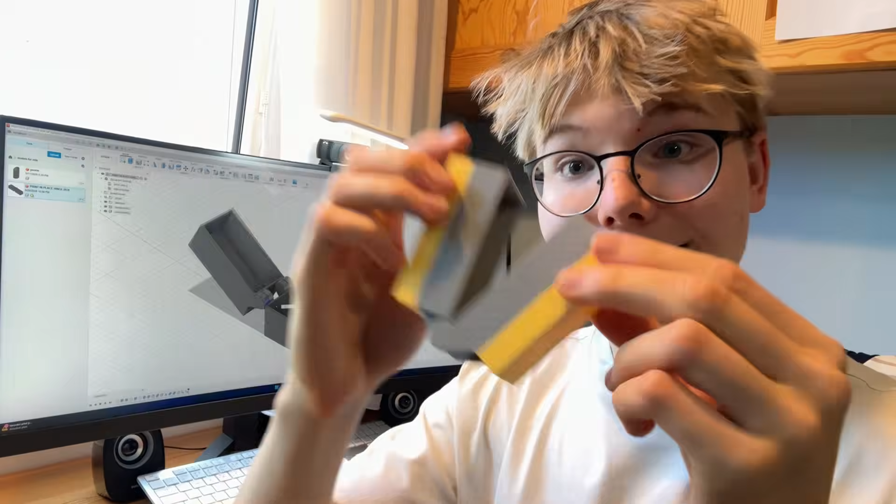This is a box of hinges and it was designed using Fusion 360. So let me show you how to do it to make it completely print in place. No extra talking, let's go.

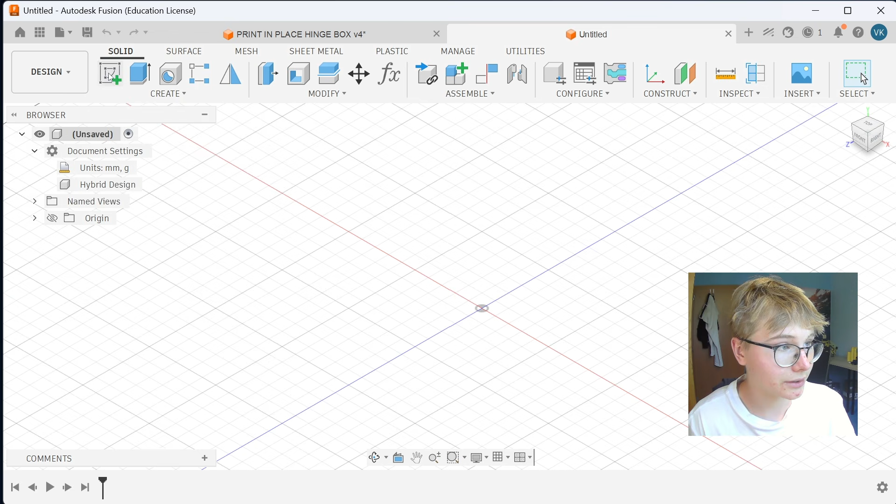Start a new Fusion project, and as always, save it somewhere so that you always know how to find it by going into File, Save, and then saving it somewhere on your computer where you know you will always find it. Now, when we start sketching, you will go to Create, Create Sketch, click on this bottom plane right over here, and now we will be making the boxes.

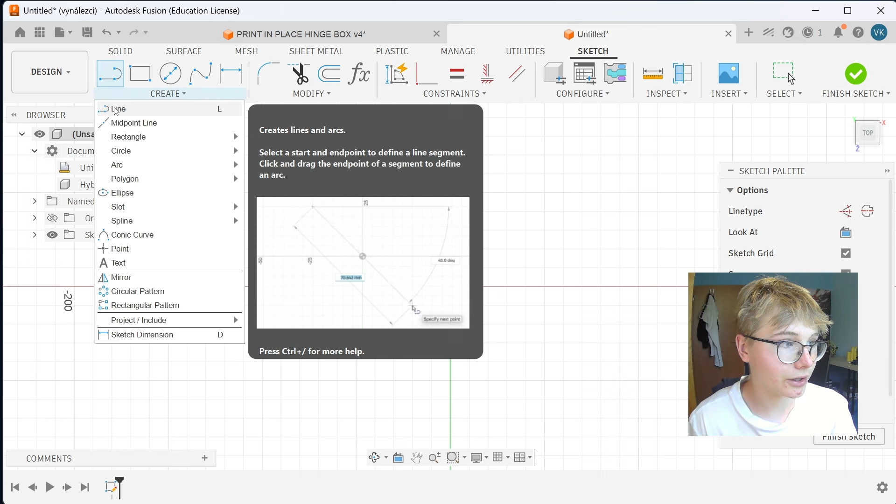So these sizes will really depend just on you, but I will make my own dimensions, and if you want, you can follow me. Now, go in the Create section. On the rectangle, we will be creating a 2-point rectangle. First of all, we will be creating it on the first side. Then we will click either L, or you can go in the Create and click on Line, because we will need to connect it with the center so that we can then space this line so that we know how far the boxes will be apart from each other.

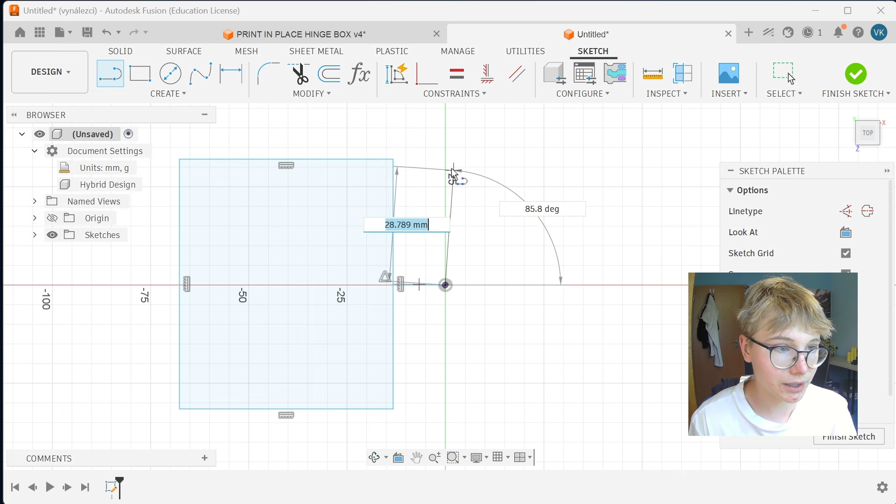And then we will need to create the mirror line, which we will use to mirror the box on the other side too, so that they are both the same size. So you will again select the line tool, start from the beginning, stretch it up. Once it's stretched up, as you can see, I don't have it constrained.

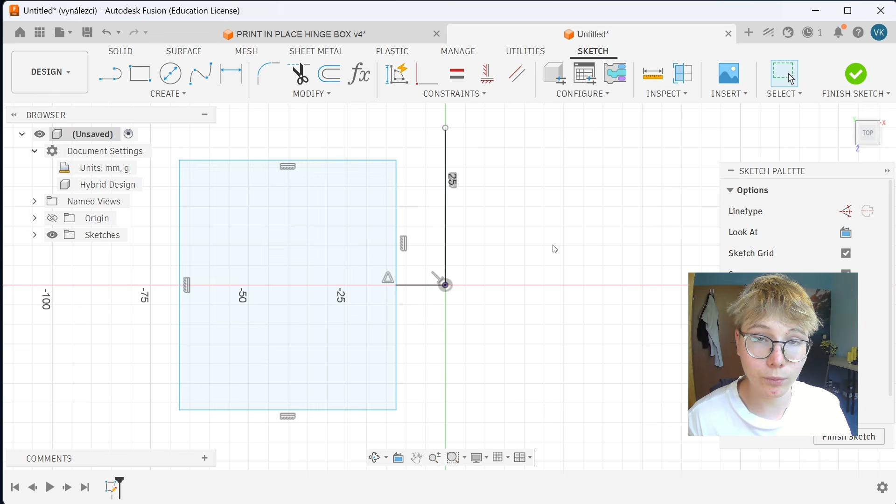So what I can do is go into constraints, then select horizontal or vertical, and as you can see, it automatically places the line so that now it's actually vertical, and it will stay that way, because if it wasn't vertical, it would mirror it somewhere completely else than I want it to be. Now, all we need to do is give dimensions to this box, which will be the outer wall of the box. Basically, this rectangle that is down there. The wall will then, of course, shrink it a bit.

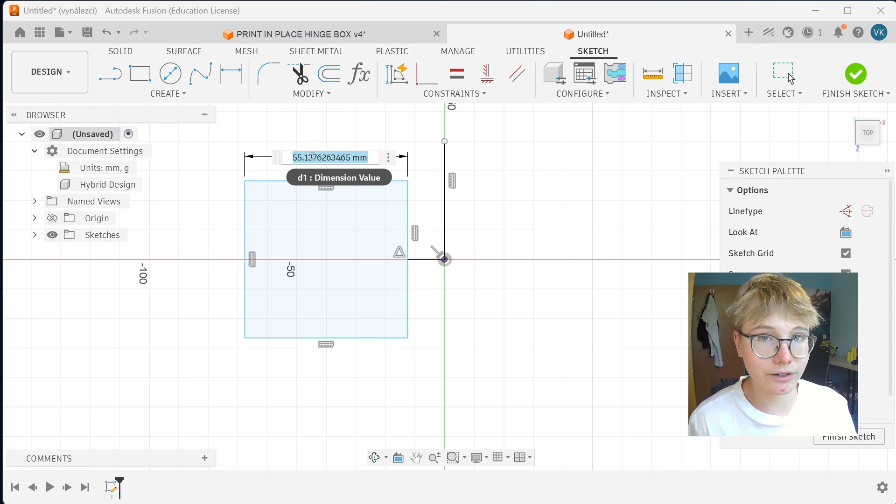To dimension it, you can go in the Create section, select sketch dimension, and then click on the box's sides and start dimensioning it. But as I always suggest, use the shortcuts. So instead of going in the Create section, you will just click on D. Once you click on D, you have the dimensioning tool in your mouse, and you can click the side that you want to dimension. Let's go, for example, for 80 millimeters.

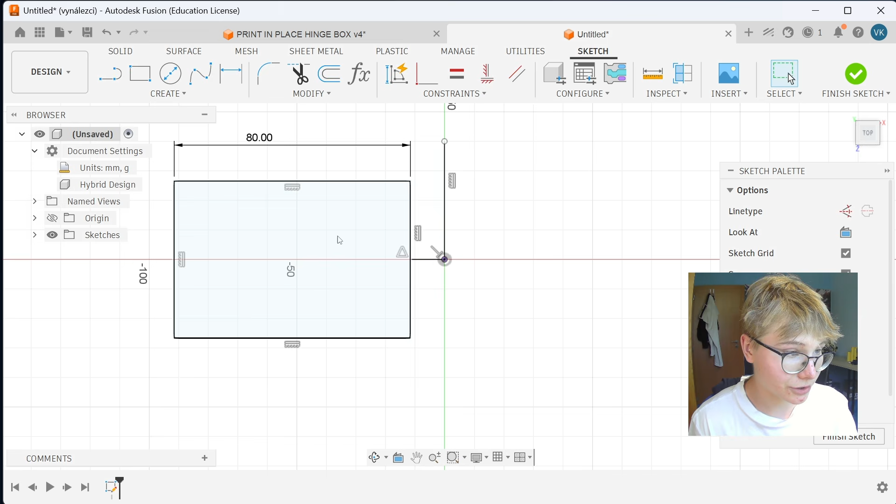And as you can see, the rectangle right now moved completely from the center. So we can just move it back because we don't want it to overlap to the other side. So once we have this dimension set, you can set the dimension for this side exactly the same way. That might be a bit small, so I will make it a bit bigger. If you want to edit the dimension, you just double click the number, and it allows you to enter a new number again, for example 35. As you can see, it edited it right away.

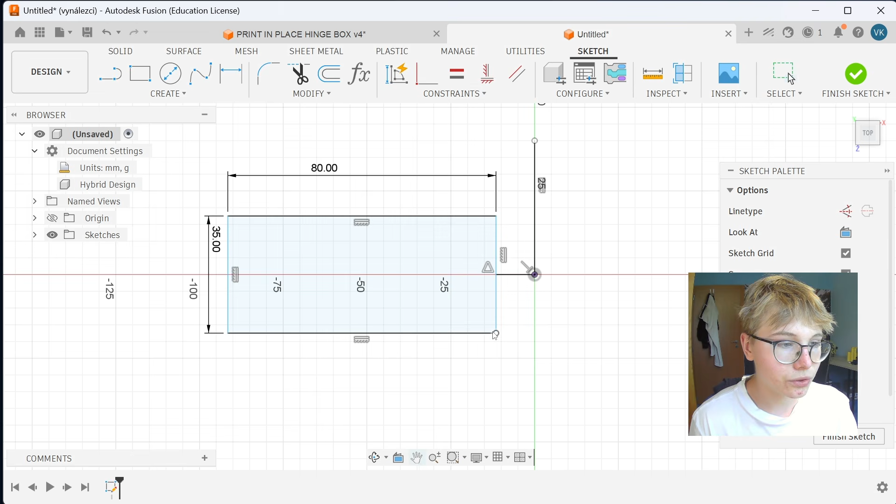The sketch isn't fully constrained. To know if it's not fully constrained, which means basically that Fusion doesn't know all of the information it needs about the sketch, you can just move the blue lines and it will show you exactly the dimension that we need to set, because you always want to end up with a fully constrained sketch.

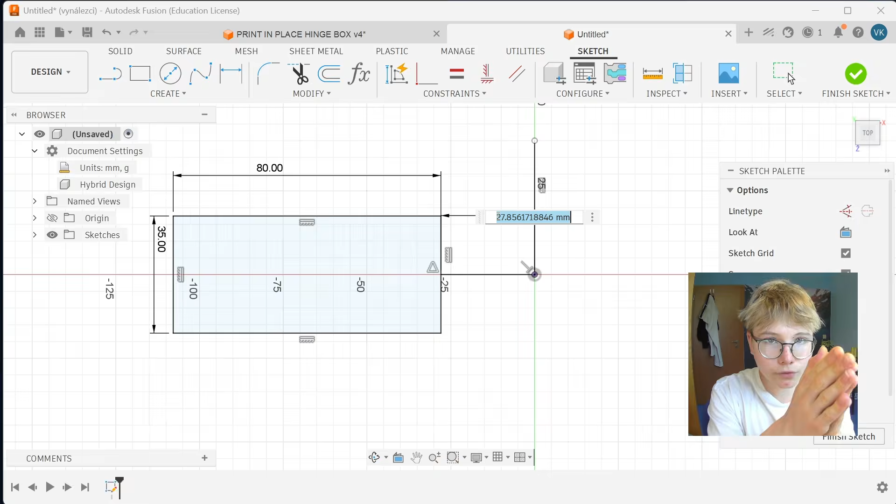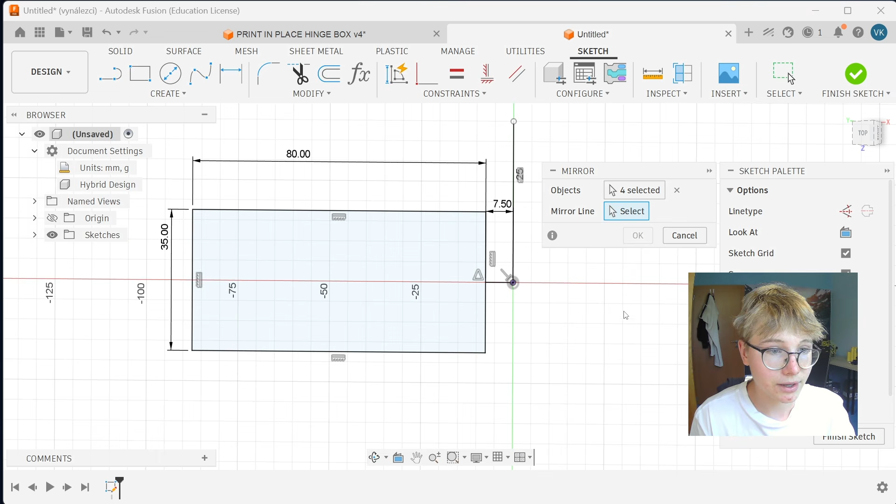So you can just again go to the dimensioning tool, select the line that you want to dimension, and because this is only half of the gap between the rectangles, you can set it to half of the gap that you want to have. So for example, if I want a 15 millimeter gap, I will just go for half of that, which is 7.5 millimeters. Once I put it in there, we can mirror this to the other side. To do it, you will go into the Create section, select Mirror, select all of the rectangle sides, and now select the mirror line that we created, and as you can see, it will pop it right to the other side.

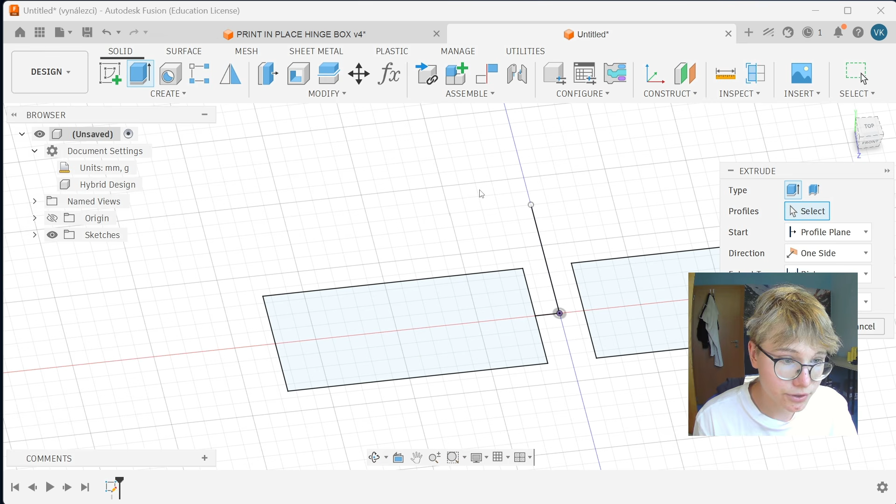Once you have that, you can click Finish Sketch to make the bottom of the whole box, which the walls will then be sitting on. You will just go to the Create section and start extruding, but as I suggest, always use the shortcuts. Extrude is E, so click on E. As you can see, the extrude menu pops up, and now you can start extruding.

So select both of the profiles, and we will be creating the base they will be sitting on. And since we are going down with the extrude, you can just put it in a minus size, because it will be going down, and because I want only 2 millimeters on the bottom, I will be extruding it minus 2 millimeters down.

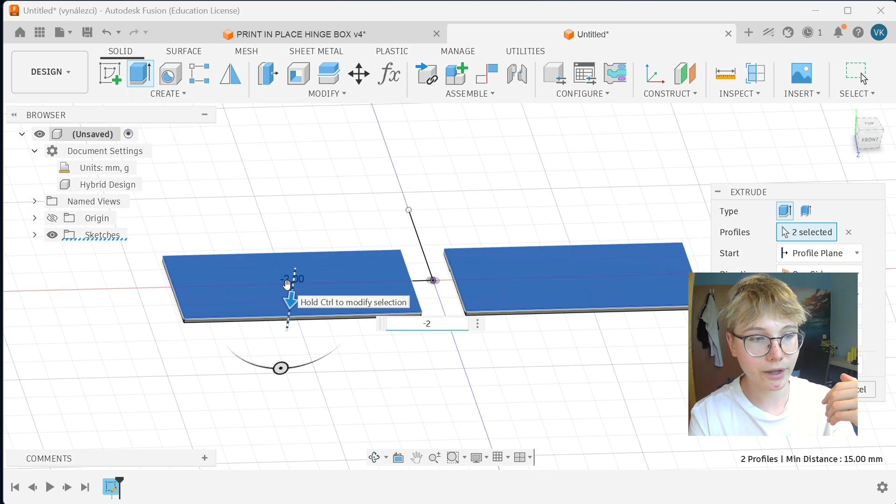Once I hit enter, we have these new two base plates for our boxes created. Then we will extrude again the exact same profiles, but now using something called thin extrude, which only extrudes the complete outline of what you are extruding. So that will create the walls for the boxes.

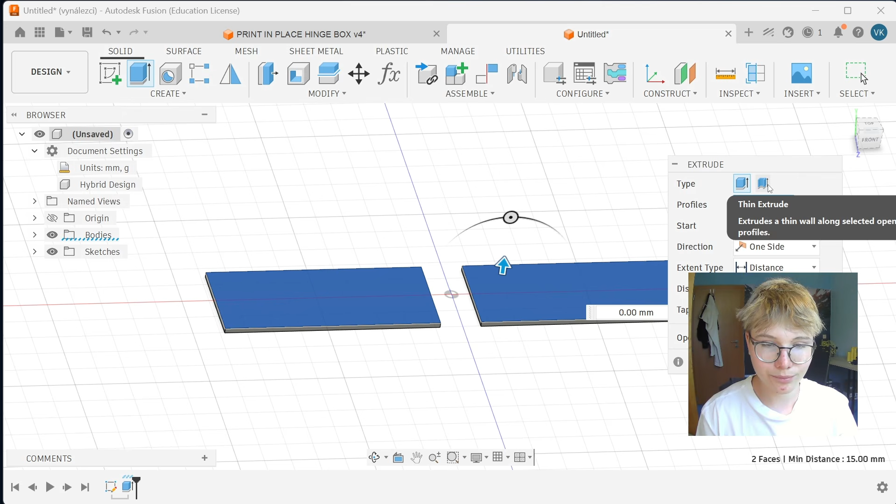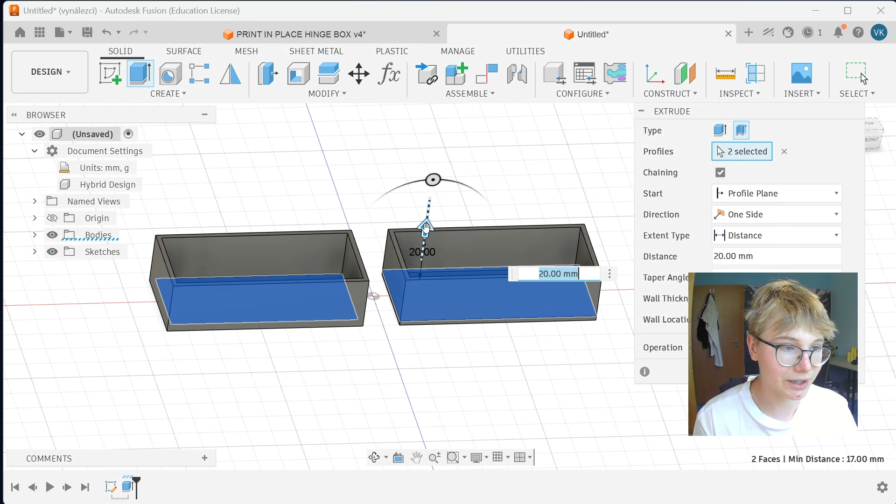As you can see, you can even select the wall thickness. Because 1 millimeter is pretty thin and the 3D printer would have problems printing it, I will set it to 2 millimeters so it has some rigidity and doesn't break when I print it. Once you have that, you can start extruding it up. Let's say 20 millimeters right now for the extrude.

We will be sketching one of the sides of the boxes. So create sketch, click one of the sides of the boxes, and now you need to project the boxes. Go into the create section and click project. There's a shortcut for it, which is P, and you'll be using project quite a lot, so I definitely suggest learning the shortcut. Click P and just click both of the objects. As you can see, when I hit OK, it puts the sketch of the things I had already created.

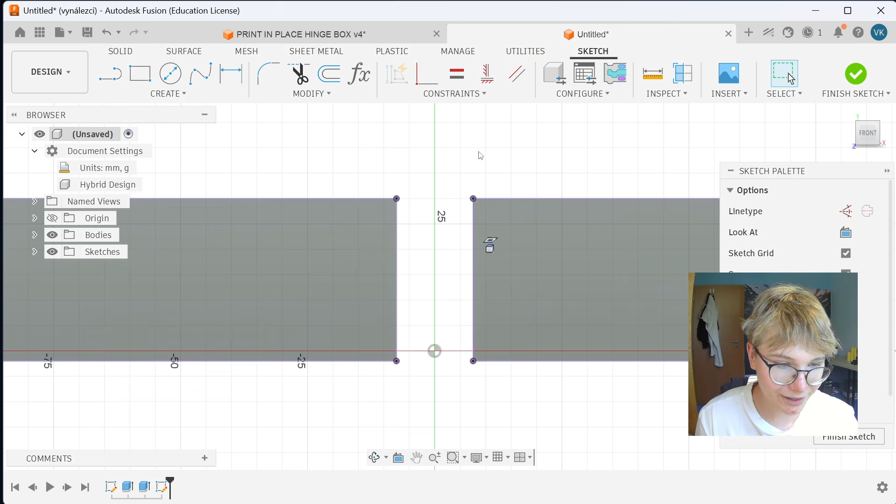Now we will be making the hinge. It will use the line tool, so click L or go into the create section, and connect these two lines on the top. Now to create the main body of the hinge, you can click C for circle, or choose it in the create section, start from the center of this line and stretch it out.

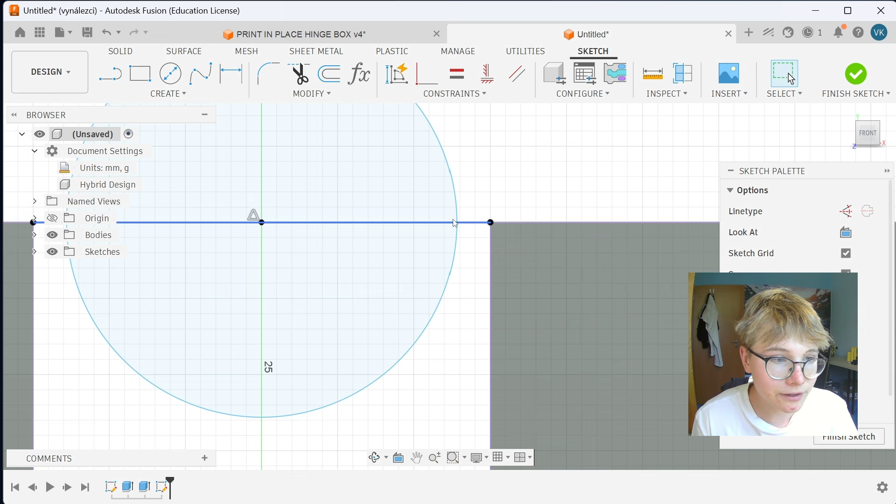I always recommend leaving a bit of gap so it doesn't interfere with the boxes. Click the dimensioning tool, then right click the circle, and instead of picking circle arc center, pick circle arc tangent, so you can input, let's say 0.5 millimeters, because now there's 1 millimeter of space between the hinge and the boxes.

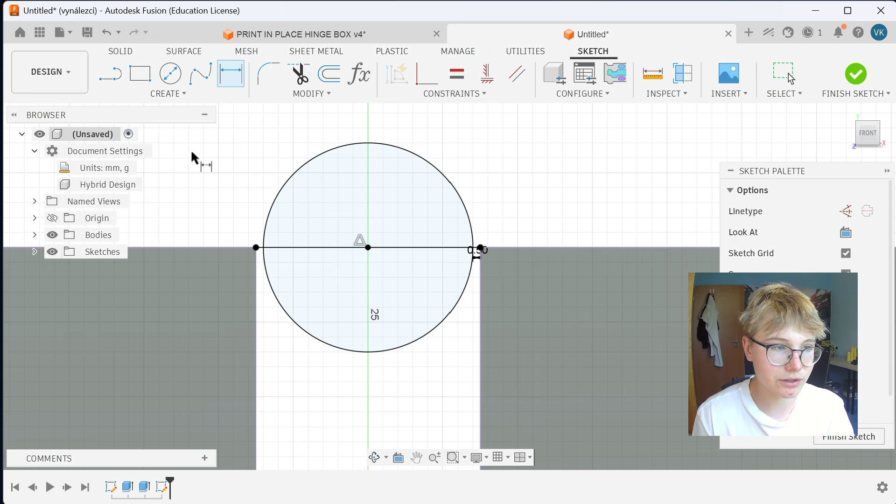Now we need this support for the hinges, because if it wasn't there, it wouldn't print, since right now it's just flying in the air. So you click the circle and put it to the projected side of this rectangle, and as you can see it's already snapping on the side. Click it, then go into constraints and choose tangent, so that this line can be tangent to this circle.

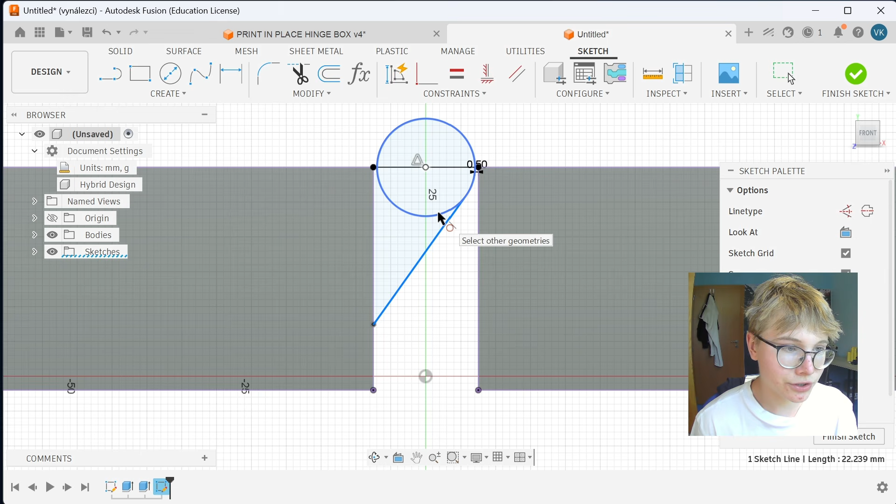What we need is this angle right here to be higher than 135 degrees. You know it needs to be 90 degrees plus at least 45, so you can actually input like 55. Now you have the angle and you know it will print very well.

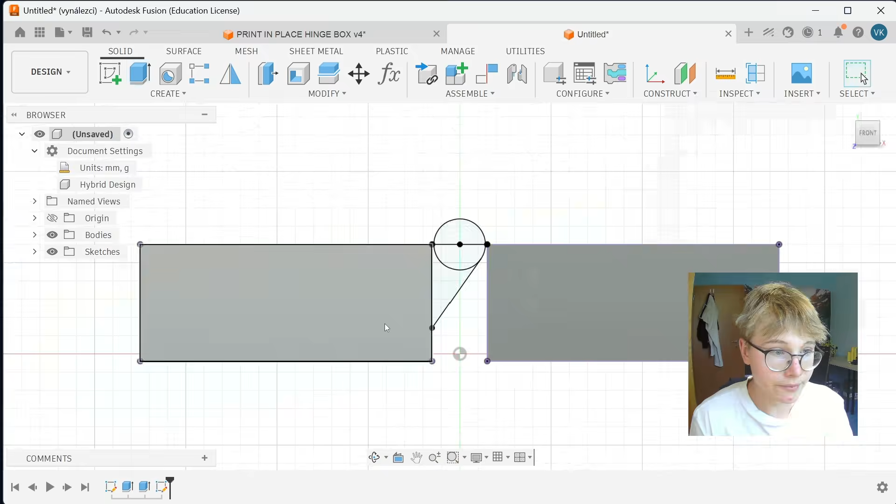That's all from this sketch. You can finish the sketch and now start extruding this hinge. Select the three profiles we just created and extrude it, let's say 5 millimeters. Make sure the operation is set to new body, so we can operate with the hinge a bit more, because if it joined, we would always have to operate with the box as well.

We will join it later on. Now click OK, so you have the first hinge in your design.

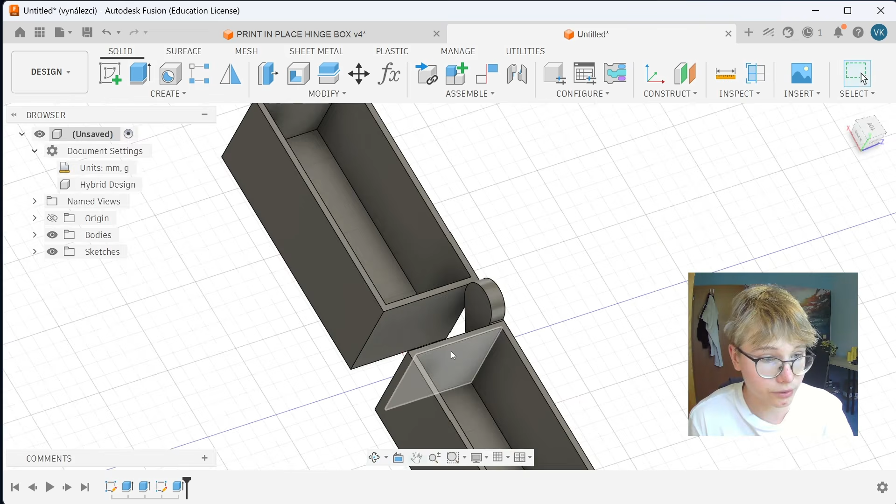Once you have that, you can start a new sketch on this side of the hinge. Once you start the new sketch, you will again project it - that's why the project tool is just amazing. You'll project everything you have, both the boxes and the hinge, and now start a new circle from the center of this hinge, which will create the small pin that will hold the hinges together and let them rotate around.

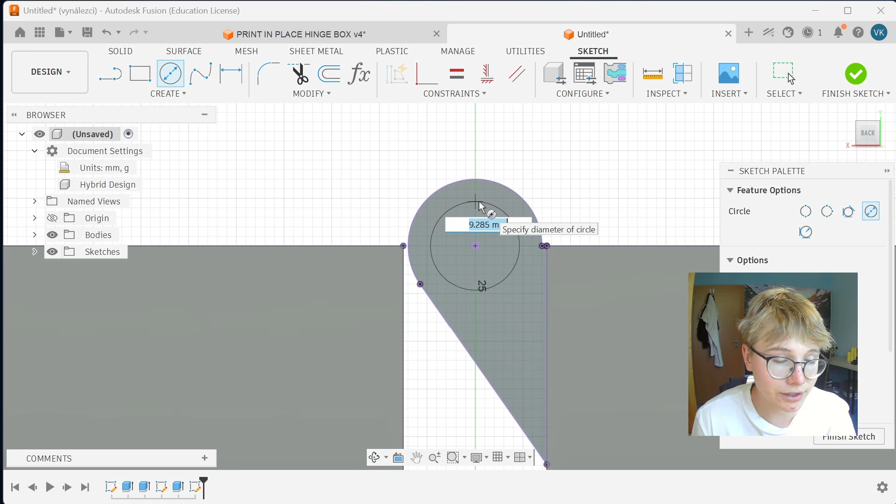Once you have that, sketch it and make sure it's smaller than the hinge before - let's say I'm going to input 8 millimeters. Just make sure there's enough space so it's not crazy close, because the printer doesn't have that much accuracy to print it well.

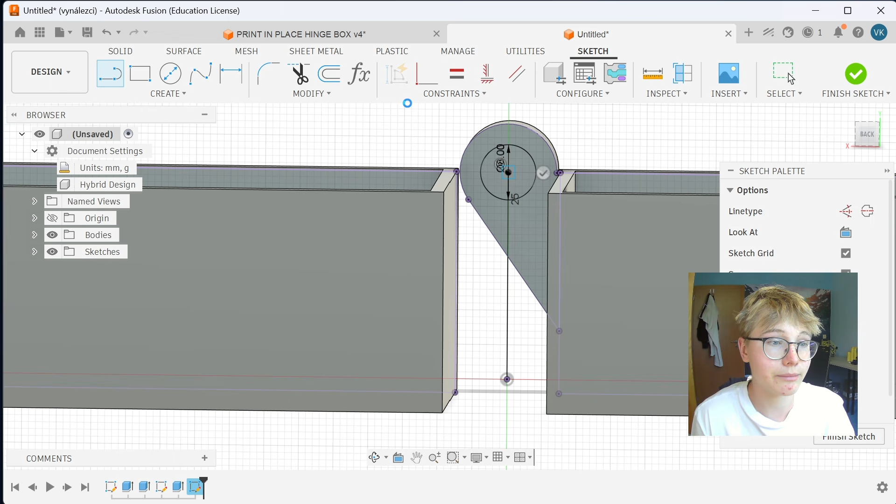Once you have that, we will create the second profile of the hinge, which is basically just a mirror of this hinge to the other side. We will create a mirror line by connecting the origin with the center of the hinge, so we can mirror the whole sketch of the first hinge across.

Select mirror, select all of the things of the hinge. When you have it all selected, it should be 4 objects, so make sure you have all of that. As the mirror line, select the one we just created, click OK, and you have everything you need in this sketch. Finish this sketch so you can start extruding the pin.

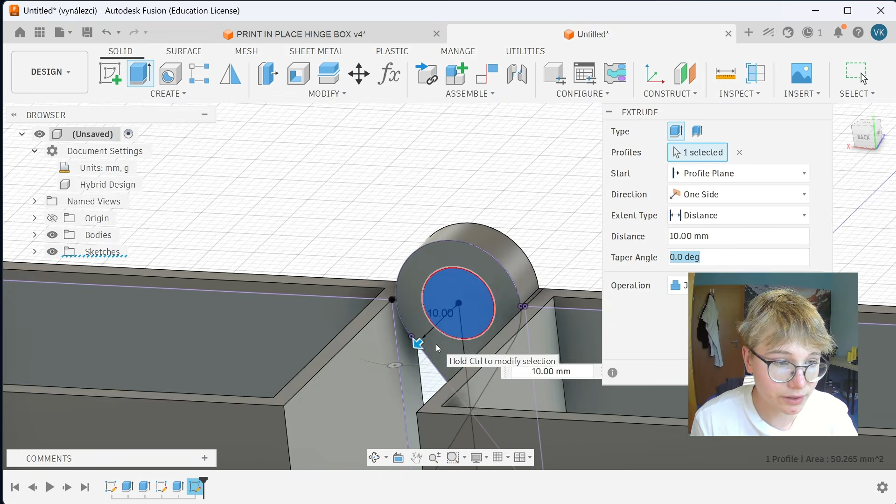And because we made the hinge 5 millimeters of extrude, we can actually make the pin just 3 millimeters, so that then the other hinge would have 5 millimeters of wall thickness and 3 millimeters cut out from it, so that there would still be a wall that is 2 millimeters thick. But as you can see, this would be a complete overhang here from the bottom.

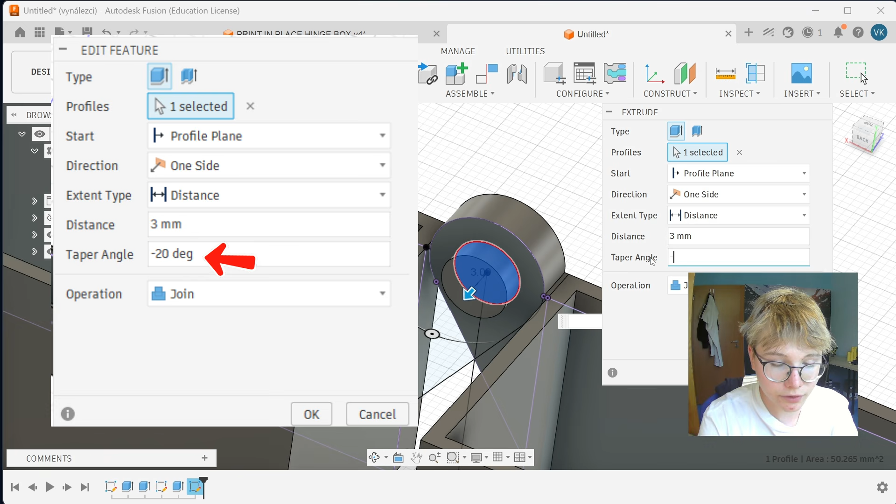So now input the taper angle of -20 degrees. As you can see right now, what it does is it basically shrinks the extrude to the top. -20 degrees is quite nice. Once you have this created, you will even fillet it so that it's even more smooth. So just drag this arrow and make it smooth. Doesn't really matter how much. So let's say 3 millimeters.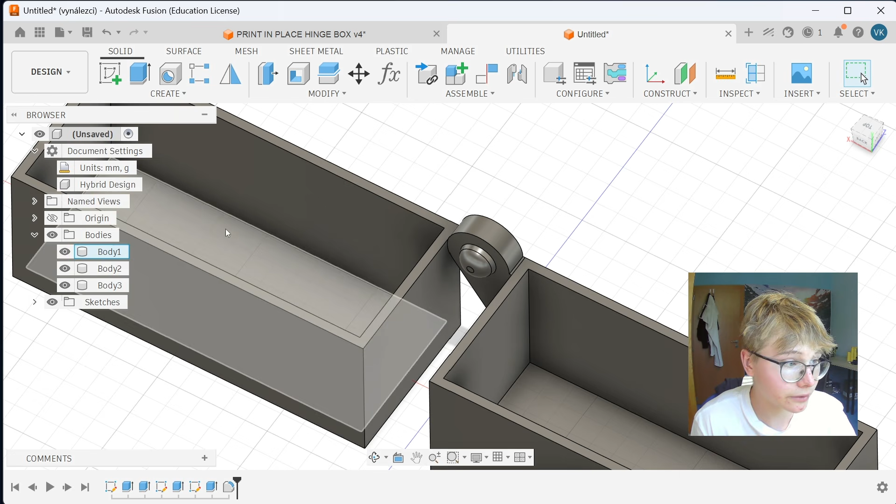Now we need to create the second one, and to do it we need to go in the sketches and reveal the third sketch that we made. Now you can zoom in and select all the profiles of the hinge that we need to create. Once you do that, it should show that you have 3 profiles selected, but the start will actually be with an offset, because we need a bit of space between the hinges so that they don't print together. So select an offset, and let's say that 0.3 millimeters will give it enough space to not print together.

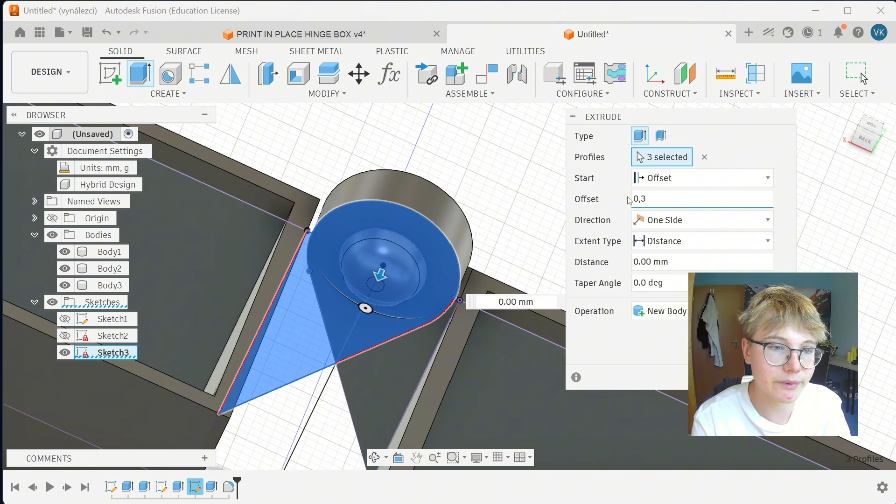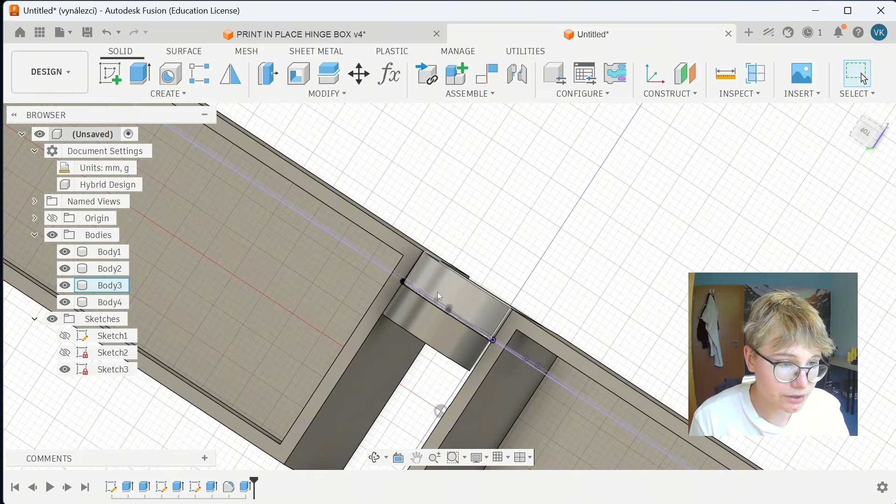Once you have that, you can drag the arrow to start extruding it, but as you can see, it automatically selected cut, which we definitely do not want. So you will again create a new body and set the extrude to be exactly the same as the hinge before, so that it's symmetrical. Once you do that, you can hit enter or OK. As you can see, the space right now between the hinges is exactly what we needed to have.

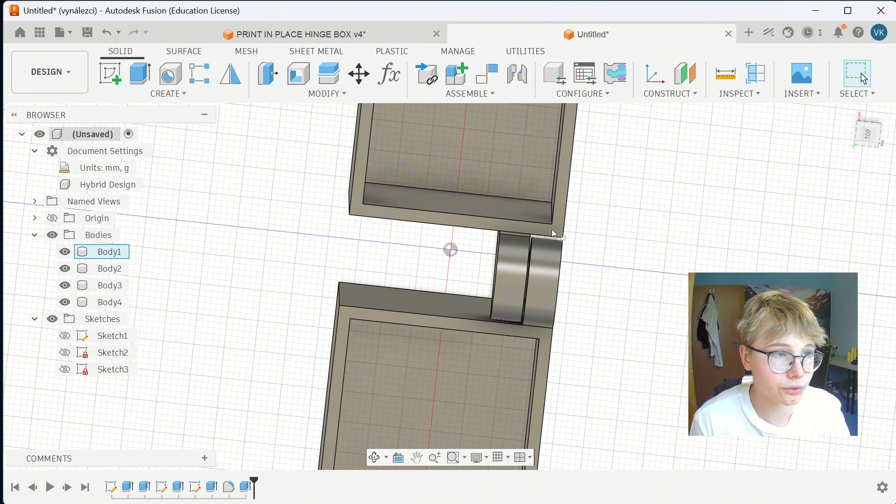But when we now hide the first hinge by clicking on it and pressing V, which hides the object, or you can just do it in the object menu, you see that the first hinge doesn't have the hole that we need there to be. So what we need to do is use the combine tool. So go in the modify section, click combine, and then select the target body, which is what we will be cutting from. So that's the second hinge, and the tool bodies are what we are cutting with. So that's the shape that will be carving it out, right?

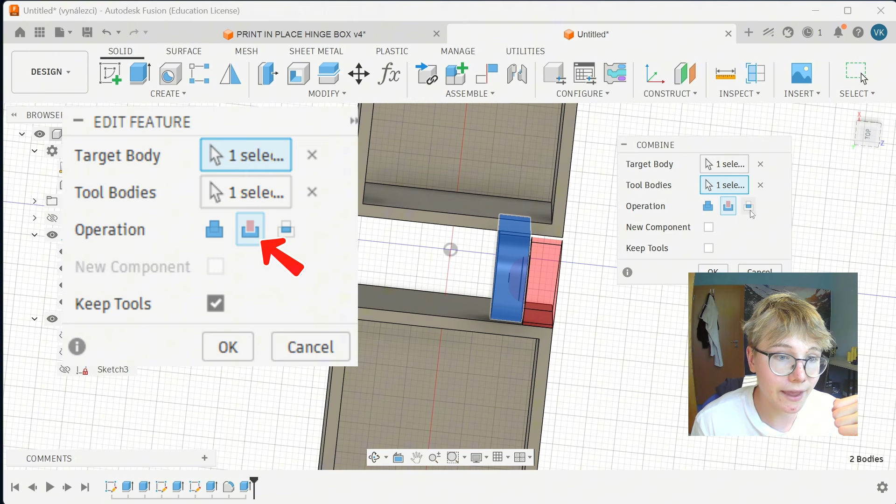So select the second hinge. Now as the operation, select cut and keep the tools. This will make the first hinge that we are using as a cut tool stay in the design. So then click OK. Once you have that, you can again hide the first body so that we can see the hole that we just created.

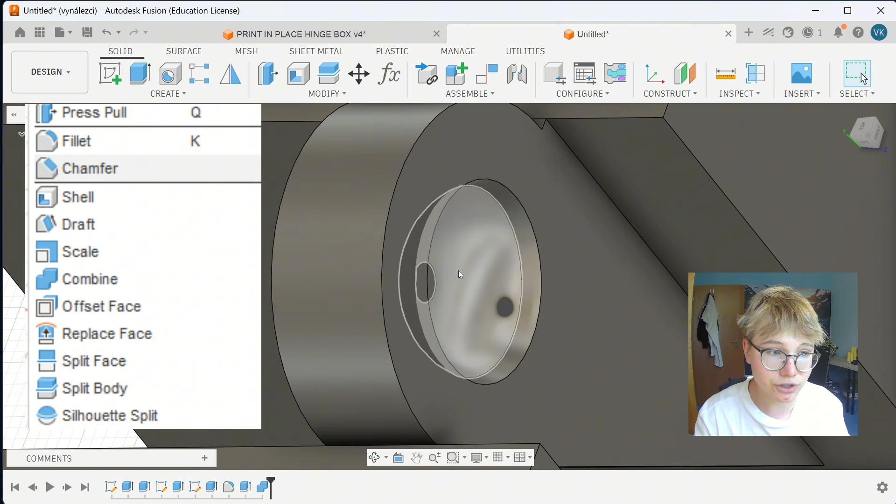And once you have that, we need to give this a bit of an expansion so that they have space to move around, because right now they are dimensionally completely accurate. Let's go with 0.3, trying to make sure that everybody, no matter how calibrated your printer is, can actually print this. As you can see, I needed to put it in minus because we are expanding the walls, not shrinking them. So once you have that, you can click OK. You have both of the hinges created.

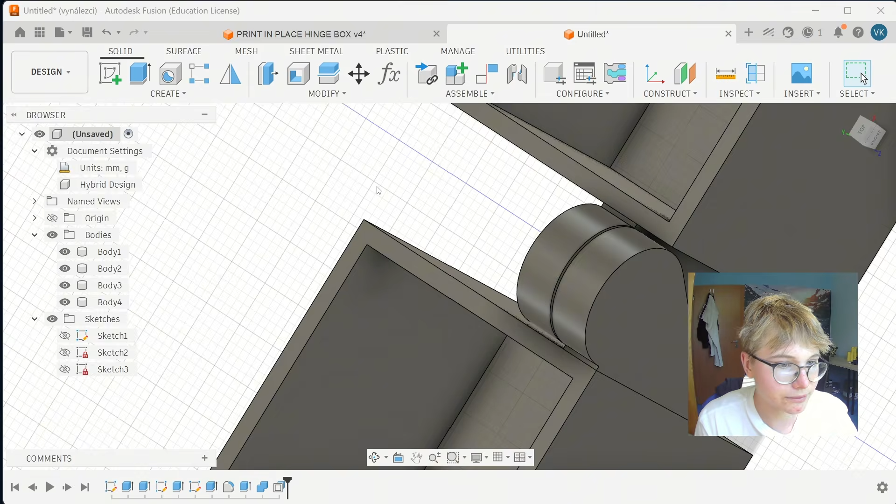And now you can reveal the first hinge, and now we will be mirroring them by selecting the mirror, selecting both the hinges, and the mirror plane will be the plane that is automatically in the design, which for me is the XY plane. It will probably be for you too. Once you select it, it will automatically show you a preview of how the hinges will look on the other side, but we don't have them joined with the boxes.

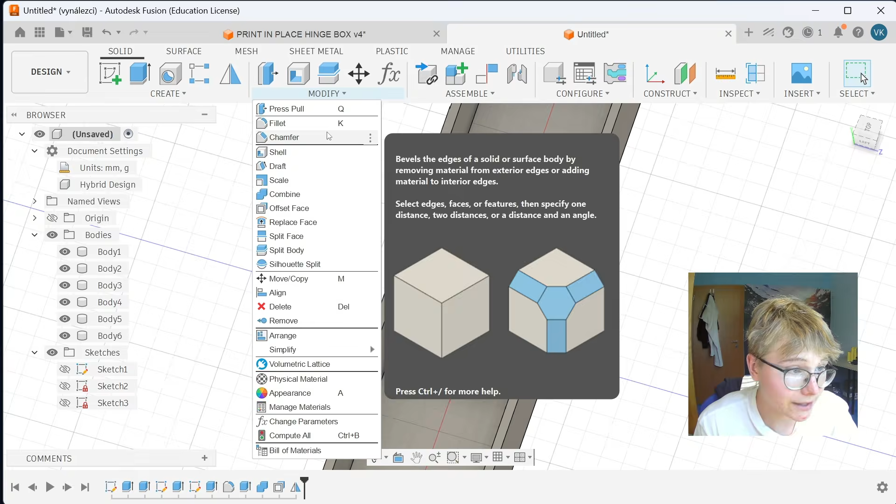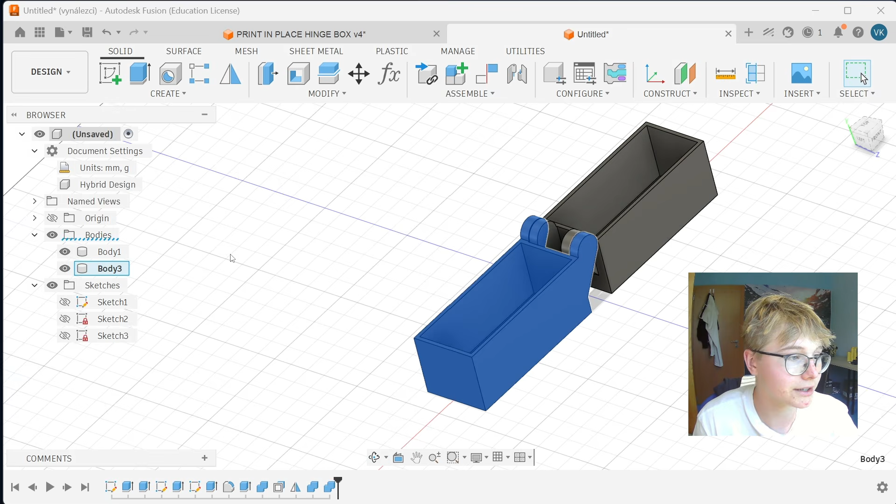So now go in the modify section, select the combine tool, click join, and select the box and the hinges that belong to it. And definitely don't click keep tools right now, because that would just duplicate the hinges in the design environment. You can just click OK and replicate the exact same process with the box on the other side and its hinges. Once you do that, you should end up with only 2 bodies in your design. Of course, there's a lot more we can do with this design, but because I want to keep this completely beginner friendly and for everybody to be able to replicate this, I will keep it this simple.